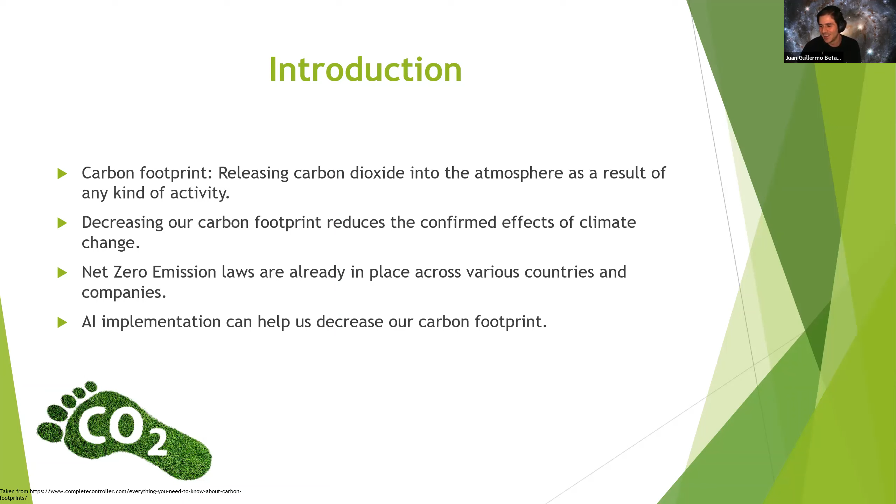Also, if I'm speaking too fast, just let me know, because I tend to go at it 0 to 100.

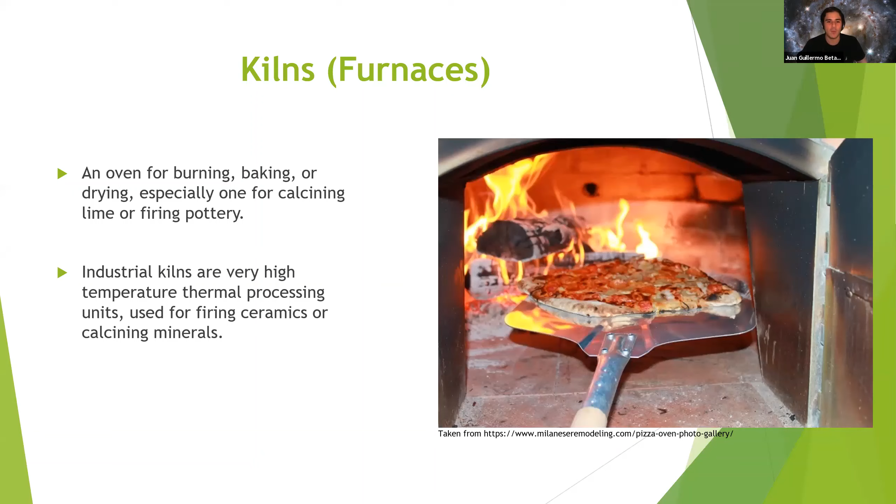Okay, so let's talk a bit about kilns. These are the names for the furnaces in the industry. So it's basically a contained system for burning or baking or drying, specifically in our case for heating up or calcining some materials like lime or cement. And industrial kilns are like the furnaces that you can imagine, but at really high temperatures and hundreds of meters long. And they're just huge assets that release a ton of energy. And there's a lot of requirements in industry right now to improve these processes.

So anywhere from the mugs you use to drink your coffee, the plates to eat your food, to your toilets in your bathroom, all the way to electrical resistances that are in the power lines. All of these things are made in these furnaces. And these processes can take from 24 to 40, 46 hours inside this furnace. And as you can imagine, taking one of these furnaces up to, let's say, 1200, 1400 degrees Celsius, that's a lot of energy burning for a lot of time.

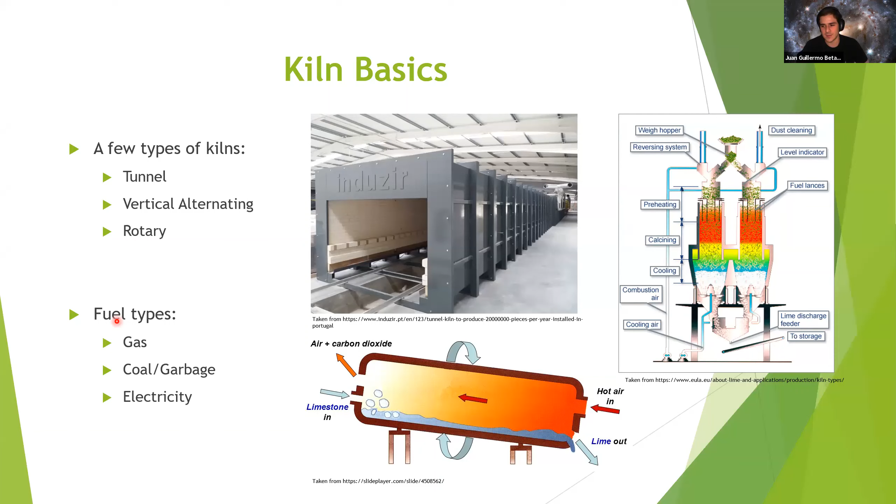So I mean, this also affects carbon footprints, but it's part of the process. And now the interesting thing about these kilns is the data. So first, let's see here. This is the rotary kiln. This is from the side here where the flame is. And you can just see it's a huge device.

Also, it can be up to 150 meters long. Just imagine a steel tube up to 1400 degrees. That's hot. It's bending. It's turning. You have a lot of variables to measure. So since these are important variables, we want to sample the data in seconds or in minutes. Usually more than that, you're really losing the trend of the data. So in industry, generally, depending on the application, you can sample anywhere between seconds and minutes.

Here we can see an alternating kiln as the image, and the tunnel kiln. So you can at least have a mental reference of how it actually looks, because sometimes that diagram doesn't really explain how the kiln looks. And variables from these kilns, you have whatever you want: flows, pressures, temperatures, fuels, product types, masses. You have hundreds and hundreds of variables that you want to analyze as an enclosed system for your energy optimization.

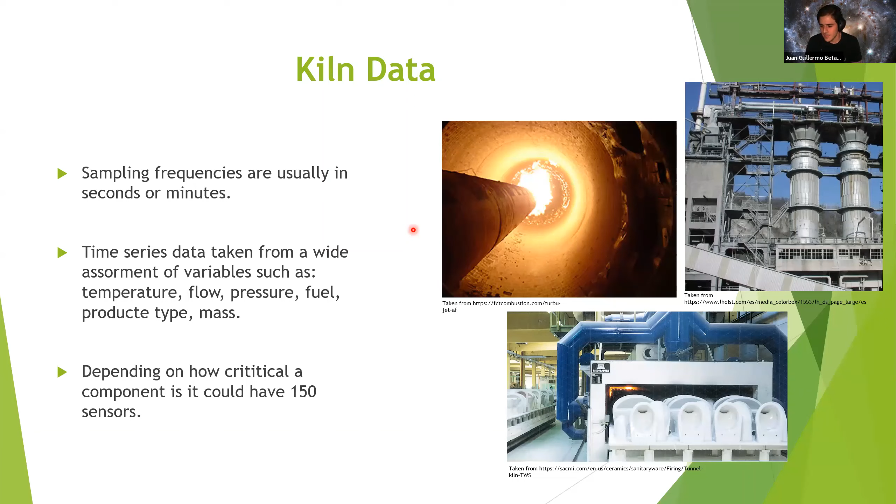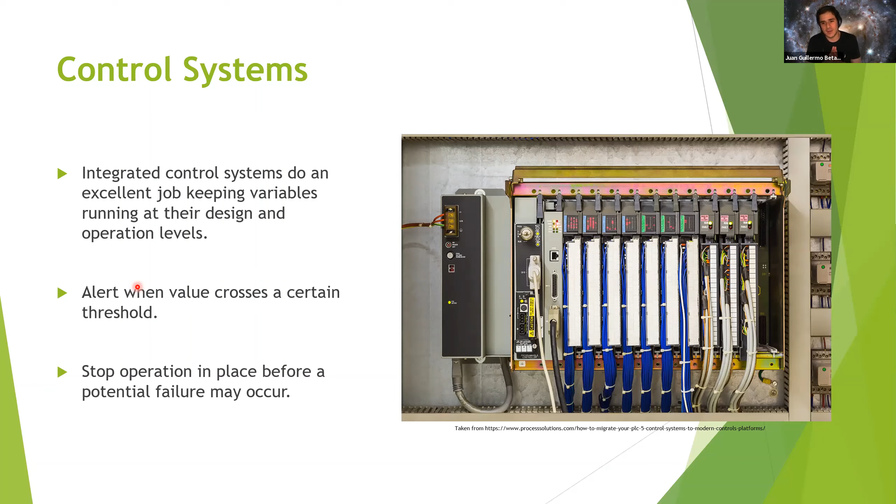So these are great tools to control your kiln, but they aren't enough if you want to go above and beyond and predict. Currently they have really advanced techniques, but for the sake of being able to easily implement it, it's really hard. It's easier to learn how to implement AI and have a lot of domain knowledge, which I'll touch on at the end of the presentation, and be able to work with the systems.

So I want to go over some of the current issues that we have right now. And you will always see this happen, that the operators in a kiln, in a turbine, with a compressor, you name it, with coal trucks, they have a lot of empiric knowledge. They've been working at the plant for 10, 15, 20 years. They're the gods there. They know how everything works. But humans always make mistakes, and we can't really rely on empirical knowledge to operate a furnace efficiently, especially if you want to, let's say, change a product.

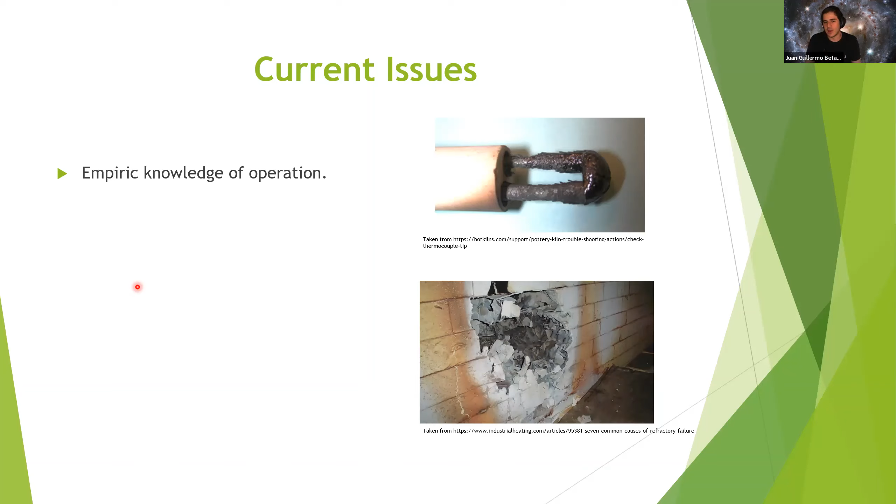So if an operator was working for 10 years with a product and then a new product comes in, he won't be able to easily transfer this knowledge to a new product. Let's say the new product is really different, because if it's the same, then you may transfer some empirical knowledge. Also, efficiencies are set with the initial design of a furnace or a kiln. So when you buy a furnace, you know how many tons of ceramic or cement or limestone you're going to produce per hour, per day. You know the material, you know everything.

But as we can see, these are a bit of an exaggeration. This is a thermocouple. This is to measure temperature. This is the wall of a furnace. This is refractory material. And this degrades over time. So the efficiency that you had initially isn't there.

I'm not sure if the chat is, oh yeah, awesome.

So the design efficiency isn't the same over time. And it's something where you can't really know how much it is decreasing unless you measure it and unless you are able to predict it, because you can have new baselines of efficiency, or if you change products, then your initial design isn't good for your new product. So these are things that are really hard to adjust.

And as I mentioned in the slide before about the PLCs, I've seen a lot that we go to a furnace and they change the PID parameters, and this really just affects how much energy or fuel or gas or oxygen is being pumped to a furnace. And you can have an excess of 20, 30, 40% of energy just in one zone of the furnace because somebody changed the parameters a few years ago and nobody noticed.

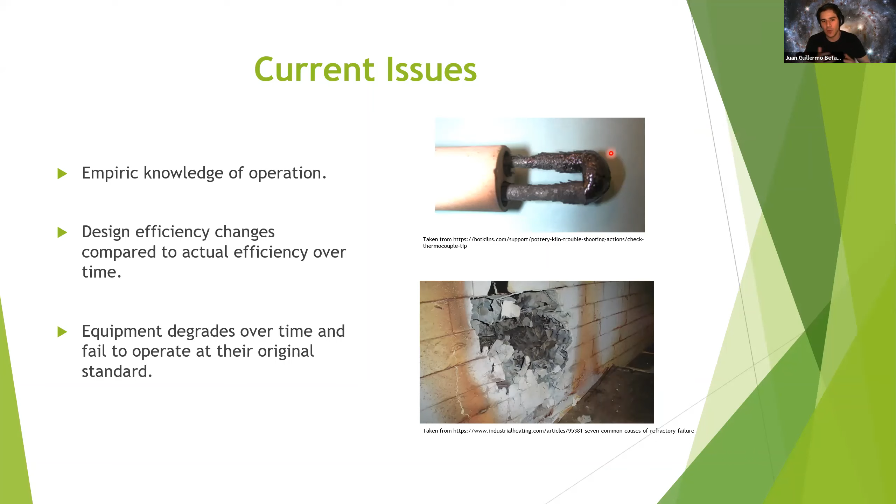And also, as we can see in the images here, equipment degrades over time. So once again, it's not to its original standard. We don't know if this thermocouple was actually giving us a correct measurement of the temperature, which means that the control system starts to heat up the furnace even more, so it can reach the temperature that it's sensing. So this is all a part of maintenance, planning, and prediction.

So as well as having stock just sitting in your warehouse to change a thermocouple, and let's say that you have 50, 100 plants worldwide, you're not going to have a warehouse at every facility with a thermocouple with refractory material. And let's say in a cement factory, you have grinders in order to pre-grind the material. So you need gearboxes, you need motors, you need rollers, you need thrust pads, you need a lot of things. And having this just sitting around isn't really viable.

Also, you can't set up a maintenance plan. So let's say that your equipment fails and you have 1 week to repair it. You just can't mobilize easily a team to an offsite location to fix a machine, since the parts are not in inventory or are too expensive to have in inventory, so you have to order them, which may take weeks or months to get in. So as you can see, planning maintenance on short notice isn't a viable option.

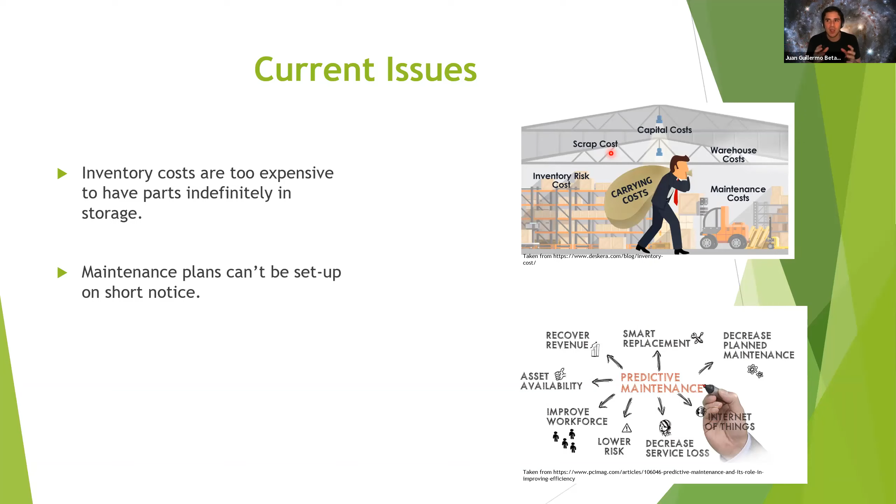I mean, this is done for other kinds of industries, let's say oil and gas, where you pay teams to be sitting around doing nothing until a problem occurs, and then you fly them over. Because the oil and gas industry loses somewhere in the range of hundreds of thousands of dollars per hour. So they do have the money for these kinds of setups. But other industries, like cement, ceramics, and other materials, focus on volume. So they can't just waste money idly with people sitting around.

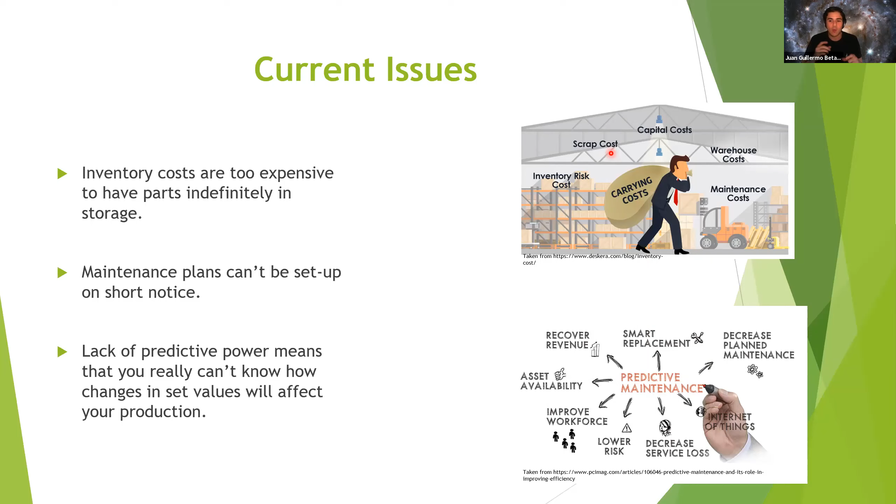And also, lacking predictive power means you can't really plan this maintenance, meaning that you have to do what's called preventive maintenance. So you maintain your equipment or your assets way before it was actually going to fail. So again, you're changing out parts that were still good and you're losing money while you're doing this. So it's not always really viable to standardize a maintenance program every 6 months or every year, because equipment or parts of a system degrade at different speeds.

So now let's move on to what you all came for, the AI-powered solutions. So with this model, and the other models that I'm going to show you, by the way, the values are not the original values, obviously, because of confidentiality. So just as a heads up. And okay, so this model, as you can see, is a neural network, multiple inputs, multiple outputs, hidden layers with a lot of neurons. I've built these models before, and knowing how to prepare the data is key.

But the idea is to basically feed the model with temperatures, with flows, with all of the process variables that we saw in the previous slides, to predict your quality, how much energy you're going to consume, efficiency, if you're able to actually predict it, because that one's a bit more complicated, and CO2 emissions. And the idea behind this, if you have a model that predicts with decent accuracy, because in these types of industries anywhere from 70, 80 to 90% is a really high accuracy, then you can start tweaking parameters in order to optimize your outputs.

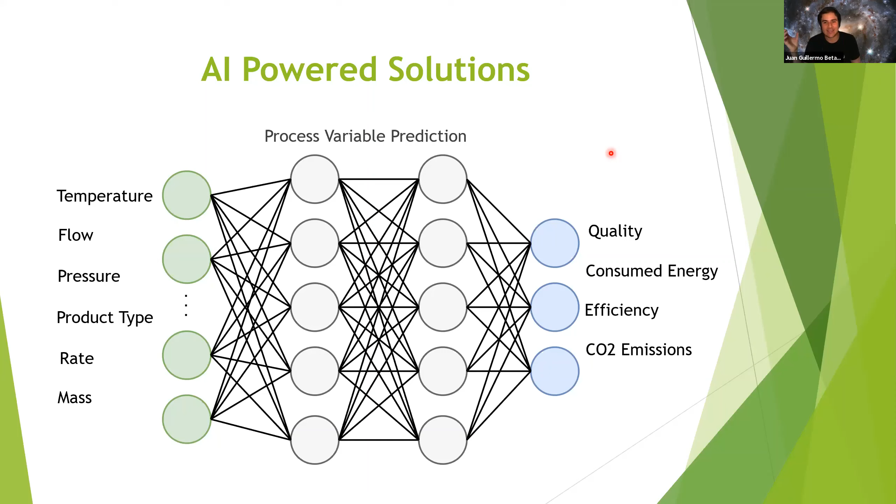Another of these AI-powered solutions is predicting your operation. So on the left side, we can see different temperature profiles for carts going inside of the tunnel furnace that I showed you. So these are hours, and depending on where you place something in the cart, you will be exposed to different temperatures for different amounts of time. So you can optimize the placing of your ceramics according to the temperature that you know it needs to receive and for how long, because depending on the time that a certain ceramic is exposed to heat, it will form different bonds, and it needs time to actually cook and merge those bonds into place. So it's really important to know how this occurs.

And also all of this can be modeled with what we saw in the previous slide. Let's say that you want to start up your furnace, and you had a shutdown because you had a problem, or because they went to lunch, or for whatever reason. If the furnace cools down to a certain point, how much time will it take to reach its optimum point? And it really depends, because the energy expenditure that you need for a furnace is not linear.

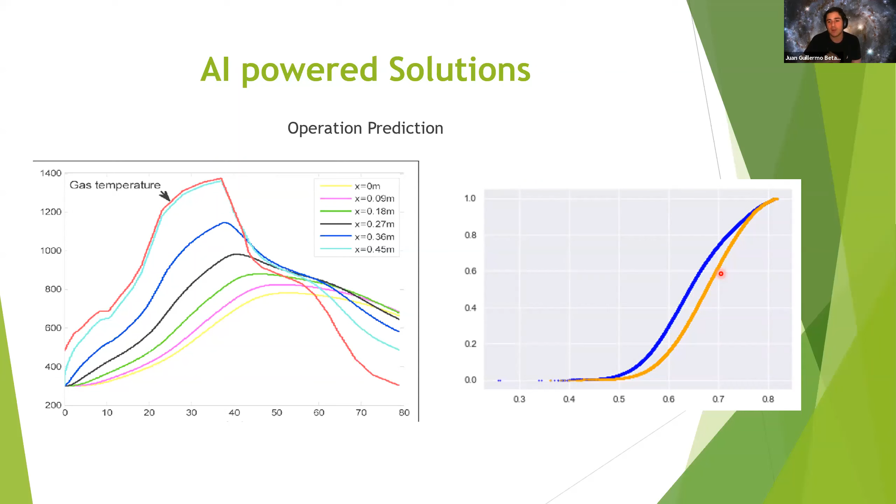So there's no linear relationship here, because it's exponential. So really timing these moments from when a shutdown occurs to when you power it up means that you save energy, because if you know that it takes exactly 48 minutes or an hour and 20 minutes to heat up, then you can plan around that and make sure that when it reaches optimum temperature, you're ready to start producing, and not have the furnace reach its optimum temperature and hold it out for half an hour, 1 hour while you prep, because you weren't sure how long it was going to take to reach that point.

And last but not least, as I mentioned before, these equipments also fail, but some of those are easier to spot, let's say in mills. So you have a mill that has to grind a lot of material, and mills have motors, and they have gearboxes. So everything's moving, everything's vibrating, and these vibrations do lead us to interesting information. Vibrations is one of the first indications that something's wrong in rotating equipment and in mechanical equipment.

So by analyzing the vibrations and being able to cluster these vibrations and to identify if it's vibrating with a certain power, with a certain temperature, with a certain pressure, if it's normal, if it's abnormal, if it's something that's going to fail right now or not. So these are different techniques that you can actually use on these kinds of equipments to try to predict and prevent failure, and try to, at least a few months ahead, know, hey, this component may be failing in 2 to 3 months to 6 months. Maybe we should schedule a maintenance soon and not have it either fail or waste too much money with maintenance that doesn't really need it.

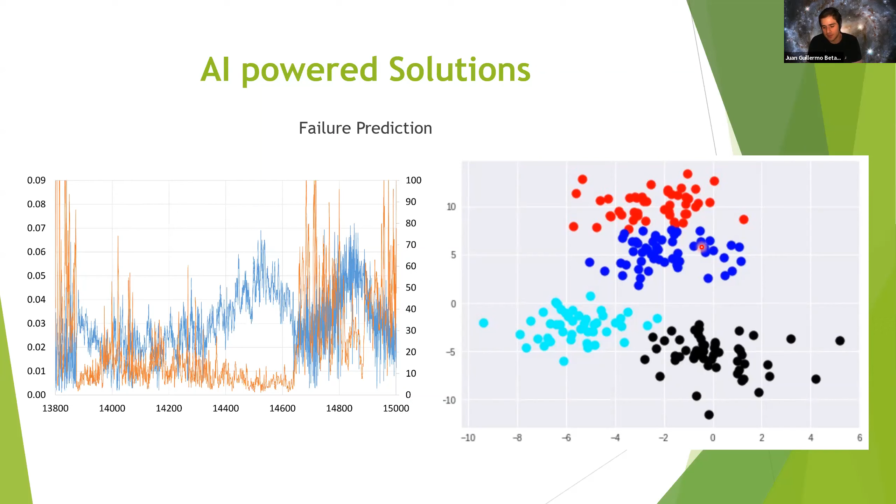And to just wrap it all up, this is the application of AI where you need data science and domain knowledge, meaning that if you have a strong background in industrial assets, in logistics, in finance, in banking, in marketing, in whatever, having that intuition that when you see data, you understand it, and having the tools, because machine learning and AI is a tool, knowing how to implement those tools is what right now not just this industry, but the world needs.

Right now, people need specialized data science / machine learning profiles, people who understand the data, who understand the problem, who can speak with the technical team, with the data science team, with the machine learning team, and being able to translate, because sometimes, believe it or not, people just don't understand how these tools work. And I've been there a lot of times when people think that this is just like a magic box that you just put stuff in and it will automatically give a result.

No, you have to understand the data. You have to know how to classify the data. You have to engineer new features. And this is what right now the world is shifting to: really specialized profiles that know how to use statistics, have data science intuition, know how to use machine learning to optimize different problems. In my case, I just love these kinds of industries, and it's where I've always moved around.